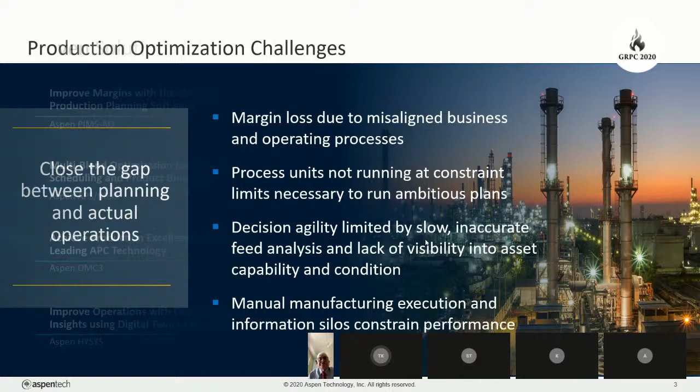Now, helping our customers implement production optimization is what we're good at. It's what we're proud of. It's what we do every day. And here I've listed some examples where we successfully delivered value. And I truly believe we can do this - we can do exactly the same for your organization.

For example, we implemented our PIMS Advanced Optimization Platform at the Global Energy and Chemicals Company across more than 15 sites. At Rompetrol, we had cumulative benefits of more than $45 million US over a period of 5 years by implementing our advanced process control technology.

So, having said that, I believe there's a gigantic opportunity still to deliver value when you look at production optimization in an integrated fashion. Let's go to the next slide.

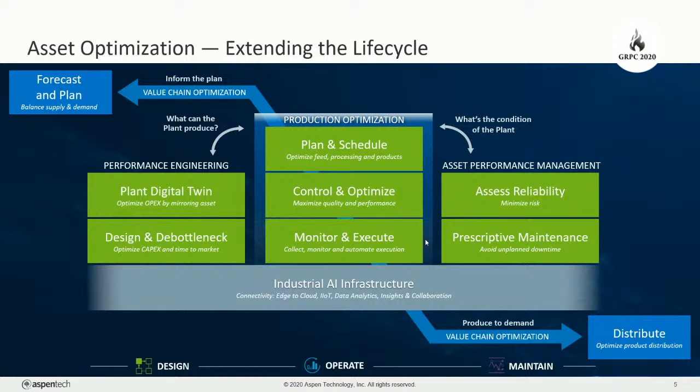And leveraging the new AI infrastructure that AspenTech provides, we believe we can drive new levels of collaboration, but specifically insights and automation across all these functions, by providing industrial AI infrastructure to all our applications, so we can help our customers achieve a higher level of asset optimization and ultimately unlock the smart enterprise. But for today, I'm going to focus on the production optimization bit. Production optimization is really the fundamental building block for a future smart enterprise or self-optimizing plant vision.

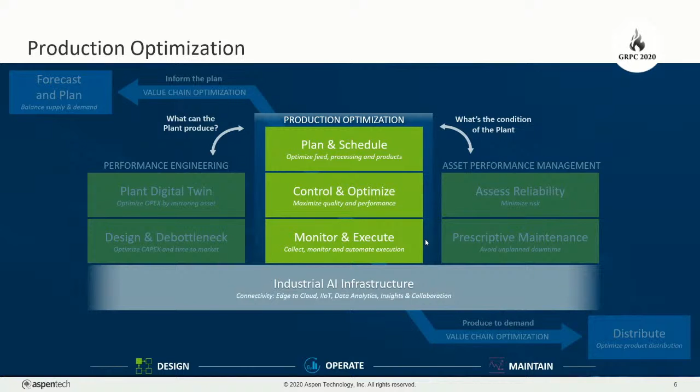So if we look at the production optimization solution, it helps address margin leakage all across your supply chain by connecting all of these business processes into an integrated workflow, as you can see here. Our production optimization is a unique solution that provides a holistic, integrated solution that integrates and unifies all these different functions. So when we look at the different layers, the first one is the digital twin.

Is your planning model up to date? Do we have the latest representations in our LP? Do we have a tool available that can use machine learning and smart algorithms to provide timely failure alerts? And that could feed into the planning and scheduling layer, where we do planning and scheduling, right?

Feedstock purchasing and scheduling - we adjust the operation based on day-to-day disruptions, which could be maintenance related, feed logistics, or product downstream delays that could cause the plan to not be achievable. Schedulers then have to re-optimize the plant, and that's why we see planning and scheduling hand in hand throughout the operating life cycle of a manufacturing plant.

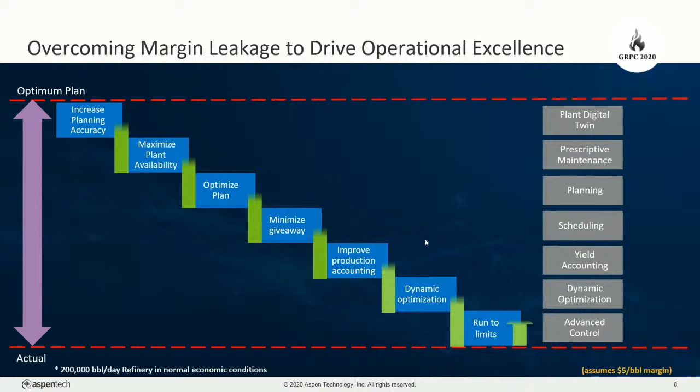Okay, so why is margin leakage so important? We saw in the previous integrated diagram that if one of these functions is suboptimal, there is margin leakage, and this slide illustrates that very nicely. This is based on our internal experience with many clients globally, and it's indicative.

What you can see, for example, if somebody would not have an integrated or planning solution in place, that the margin leakage could go up to 50 cents a barrel, and the synergy between all these different functions, we believe, drives very high values and goes into the tens of millions of dollars per annum, depending on your complexity and depending on the throughput of your plant. Okay.

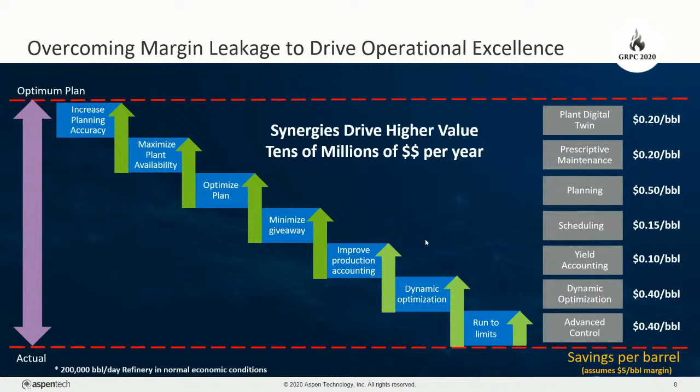So the GDOT models themselves are derived from our planning models. So, for example, FCCs, hydrocrackers, reformers. And so the reactor models in GDOT are similar to refinery LP models, albeit that we actually include non-linearity there where we feel that is beneficial, such as a conversion unit, an FCC, or a hydrotreater for that matter. And so they are more detailed models than you would typically find in an LP model.

And for this reason, GDOT actually incorporates best of both worlds. On one hand, it's similar to LPs, but on the other hand, we incorporate more detailed and complex models to accurately represent the units.

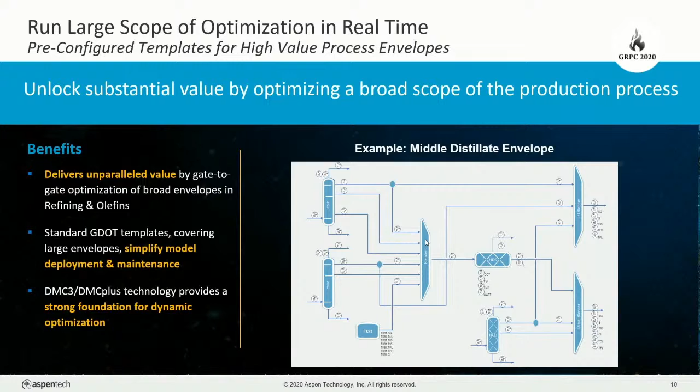So what are some of the key success stories? For distillate processing, we've shown to increase overall diesel production by 10% at certain clients, and also reduce the average quality giveaway, and this was worth $4 million to $10 million per annum. We also saw successful application of GDOT in naphtha processing, increasing the aromatics yield, for example, by 5%, and reducing gasoline quality giveaway. And we've also successfully increased conversion on feed by 3% in a residue processing application.

Also interesting is the application of GDOT in hydrogen and utility systems. They're a bit of a different category, and we've achieved significant improvement there, focusing not really on making more hydrogen, but basically to reduce losses and coordinate the different consumers in the system. And then finally, we do have references in olefins where we increase throughput by 2 to 5% by improving the yield, and this is worth $6 to $10 per metric ton of ethylene production.

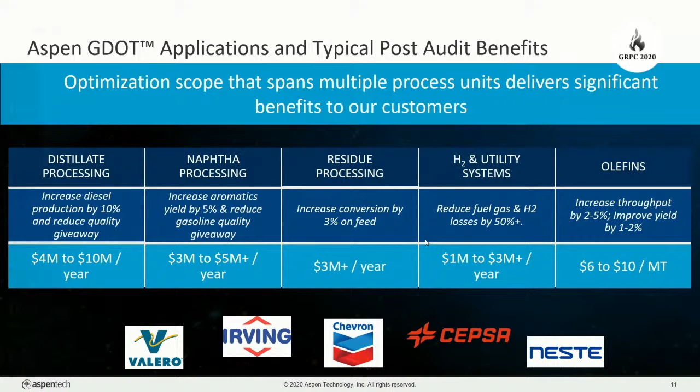So here's a case study. The refinery here was the Pembroke refinery, a Chevron refinery in the UK, and they wanted to go beyond the individual APCs and improve the profitability of the refinery. So we applied GDOT there, and it optimizes entire production trains from middle distillates to kerosene and even naphtha by coordinating multiple process units, all closed loop, with optimization cycles of around 1 minute.

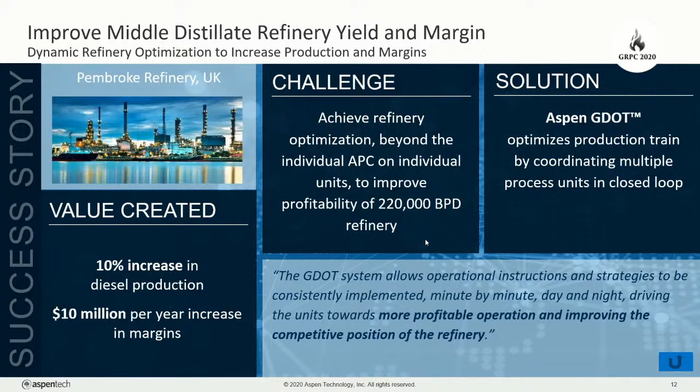And actually we achieved a 10% increase in diesel production, which in that year was worth $10 million per annum increase in margins. A quote from the refinery was that the GDOT system allows operating instructions and strategies to be consistently implemented—minute by minute, day and night, in the weekend—all driving towards a more profitable and consistent operation, and reducing the margin leakage. So this continuous coordination is really the key to success in production optimization.

If you remember, I presented the digital architecture earlier, and another key dimension is asset performance management. Unfortunately, today I only have 10 minutes, so very quick: with our asset performance management, we can expose the condition of the equipment or process by making prescriptive maintenance information available to the planning department. This enables you to plan interventions ahead of time, either to reduce the maintenance cost or to improve the margin leakage that could be caused by an unscheduled event, because you can plan for it well in advance.

An example of that was at Saras. They wanted a reliable operation of their refinery with their integrated power plant, and their strategic objective was to improve uptime but also decrease maintenance costs. And we, Aspen, installed or deployed Mtell as part of this endeavor in just a couple of weeks, and we built failure detection agents across a whole set of critical equipment.

As a result of deploying our Mtell solution, which uses artificial intelligence and machine learning to predict failures, we had a 91% detection accuracy with at least 30 days of lead time before a piece of equipment failed. So at the refinery, one statement was that they positively improved the reliability in 91% of the cases, and this led to a reduction in maintenance costs, as well as avoiding emergency or so-called unplanned shutdowns, and they could actually re-optimize their operation.

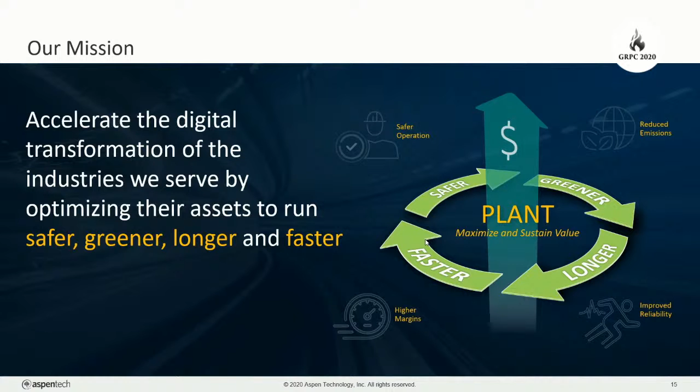Okay, so very brief overview. Our mission at AspenTech really is to accelerate the digital transformation of all the industries that we serve, to make sure we can optimize the assets to be safer, with no unscheduled breakdowns, greener, longer, and faster. And with that, thank you very much.

Can everyone hear me?

Hello, Tommy, Mr. Pramanik. Hi, can you hear me? Can you hear me? I think Mr. Pramanik is having a problem. Tommy, have you finished with the presentation? If you can hear me, Tommy has finished his presentation. Could you hear me okay? I'm now getting worried, was my audio coming through?

Thank you, Tommy, for the presentation. Can we take up the second speaker now? Alicia, can we take up the second speaker? Yes, I would like to tell Tommy that we were able to hear his entire presentation and see his presentation also, thank you for your presentation. I was getting a little worried there. All right, thank you very much. Over to Mr. Pramanik, thank you.

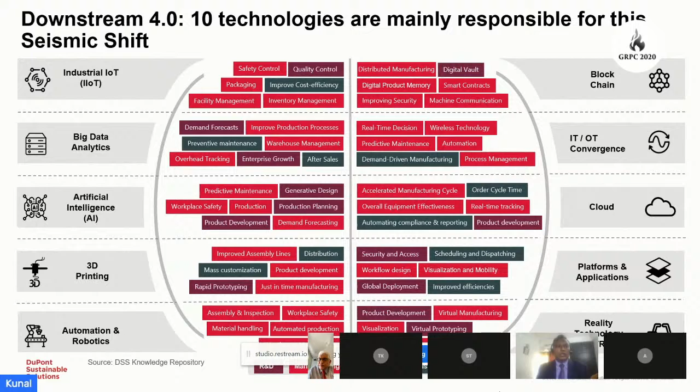And then the why and how part, understood even by management. What are the implications of not transforming, of not adapting to completely new ways, taking bold steps and transforming the organization, and how to do it in terms of process, technology, and more importantly, people—how to develop a culture of change which is accelerating.

A lot of leaders are having a thought around culture and making it one of the key aspects of the transformation that is coming in, because culture transformation is an implicit part and often the part which makes success a reality. Without cultural transformation, success can never be achieved.

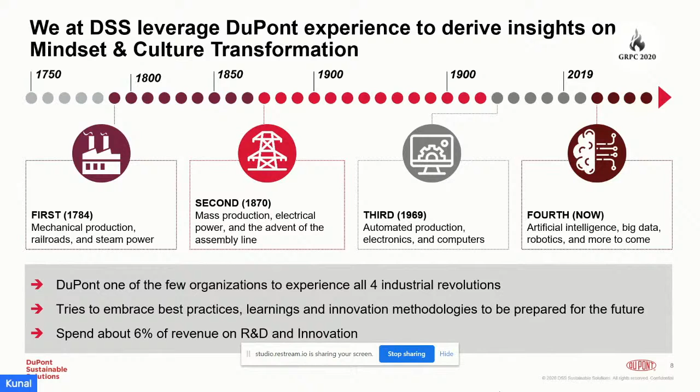At DuPont Sustainable Solutions, we leverage the DuPont experience to derive insights on mindset and culture transformation. At DuPont, we have experienced 4 industrial revolutions, starting with mechanical production and to date with the new technologies that are coming in. And so we derive our best practices, learnings, and methodologies from what we have seen during this course of time and what we have learned and implemented.

In our perspective, there are 3 critical challenges for companies to overcome to achieve the full potential of Industry 4.0 digital transformation. First is a vision and mindset around digital maturity—a lack of digital transformation strategy or roadmap. Is it understood across the organization? Do they have a vision of how to redefine doing new things, making technologies as enablers?

Second is the scale in terms of value chain. Do they have the will to transform across the value chain, across functions, and across levels? And do all people in the organization across all levels have the mindset aligned, have the competencies built in for the change objective for sustenance?

Do they understand that the new structures will need to be redefined and there will be new ways of work to get done utilizing these technologies? Thirdly, the challenge is that people expect technology to solve problems. The technology doesn't solve problems. It is a business transformation which can be enabled using these technologies. So these are the 3 challenges.

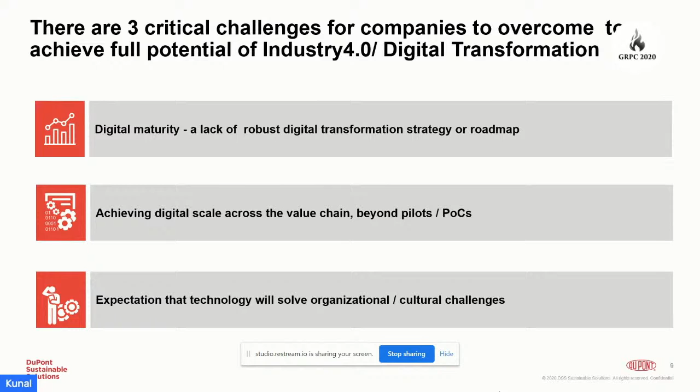Now I would like to showcase an example on how to address these challenges to start building a roadmap for the transformation by doing a digital assessment. I'm taking a case of a digital transformation roadmap for a refinery.

It begins with business at heart and people at the center. So first and foremost, across the value chain, we define the critical functions that are there. In this case, we have taken 14 functions, and then we have bucketed more than 50 domains in the organization or in the refinery under these functions. For example, if we take maintenance and reliability, we have bucketed 5 domains of turnaround, equipment performance, so on and so forth under it.

Why is it important? Because we need to understand what digital interventions are required in each of these domains, and what competencies and mindsets the frontline personnel have in each domain. Because they generally are at different varying maturity levels in the organization. What needs to be planned to bring them to a level, and what kind of implementation can be done?

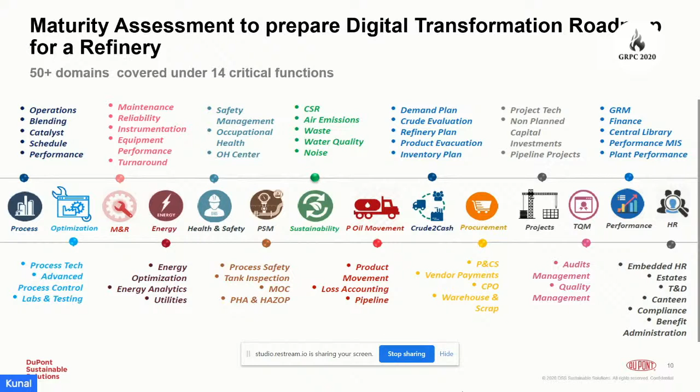The approach that we adopt is in terms of process maturity and digital maturity, with the people aspect built in to both process as well as digital.

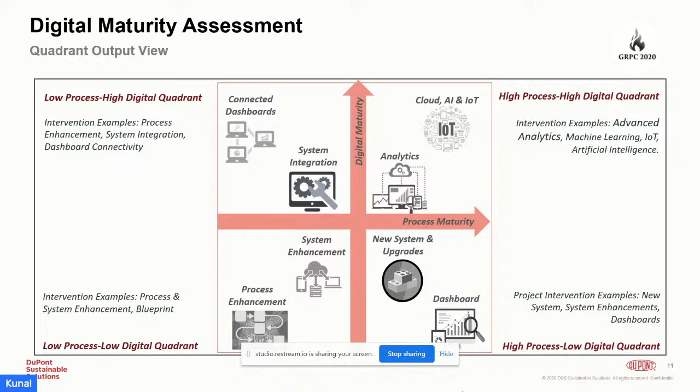After doing this whole piece, assessing each domain onto this methodology, we also do a business criticality assessment of each of these domains in terms of how critical it is from a business standpoint, so as to prioritize the investment in implementation.

Coming back to our example, on the left hand side of 14 functions in which the 50 plus domains were divided, we do a complete digital maturity assessment.

We have taken the example of one of the functions, which is maintenance and reliability. Under this function, on the right hand side, you can see 5 domains: maintenance, reliability, turnaround, instrumentation, and equipment.

We do an assessment including people as a part of both process maturity and digital maturity, and then talking with people, getting their views, and understanding from a business standpoint, we give a business criticality score to each of these.

And then we define the interventions that are required in each of these domains under a particular function, going across for all functions and then enterprise wide across the value chain.

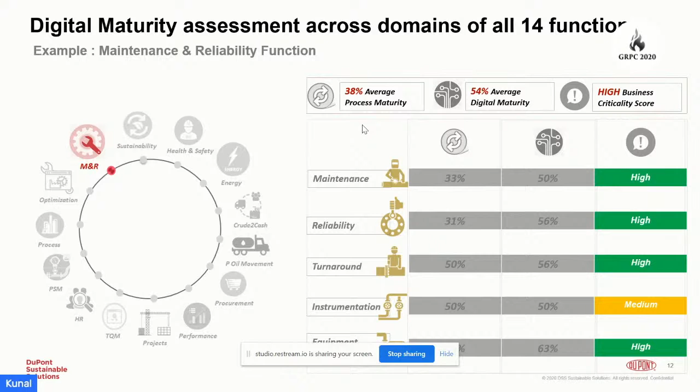To just showcase an example of how the digital interventions are done and plotted: in the maintenance and reliability function which we have been taking, a total of 15 challenges were identified along with the people in that particular function.

Hello, Kunal. Hello. Yeah, this is your chairman speaking, session chairman speaking. Could you please wind up in another 2 minutes? Sure, I'll go a bit fast. Yeah, please. Thank you, sir.

So then we placed around 7 digital interventions, 6 of which had a high impact on the organization and 1 had a medium impact, be it turnaround time, process reports, and so on and so forth.

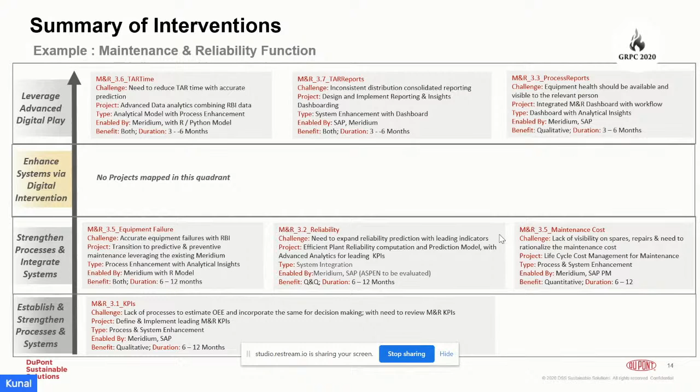Then we did projects around each of these implementations. The duration and everything is mapped out in this particular chart. The digital interventions take a little time, but the organization capability and the transformation from a culture specific point of view takes longer. This is where we help our clients with hand holding, making people understand the technology implications and bringing turnarounds.

Similarly, from a digital assessment perspective, since we have taken the case of maintenance and reliability, the suggestions for IoT came up, integrating them with the asset management software so that the maintenance in charge can get an equipment health in real time through KPIs in terms of demonstrated health meters, correlate cost to failures, predictive failures, and the frontline maintenance personnel can automatically get generated schedules and alerts to take action.

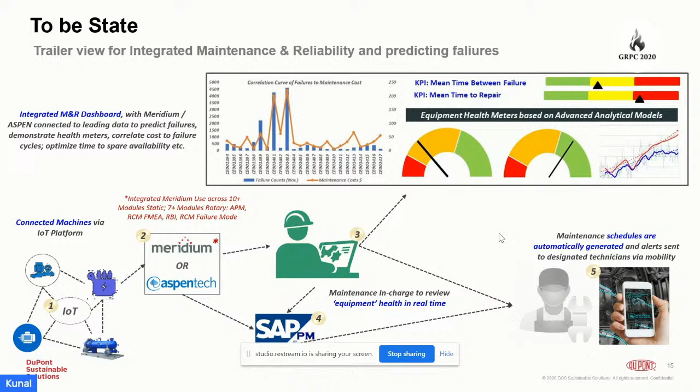We did it across all 14 functions and then gave a business criticality score in terms of prioritizing the investments, and then developed a roadmap taking into account and addressing three challenges: one, the complete vision; the scalability part across all levels in the organization, across functions and across the value chain; and third, building a competency roadmap for the people to achieve that.

With that, I'd like to end my presentation in the interest of time. Thank you so very much. For a detailed conversation, I'm available. My email address and phone number are given there.

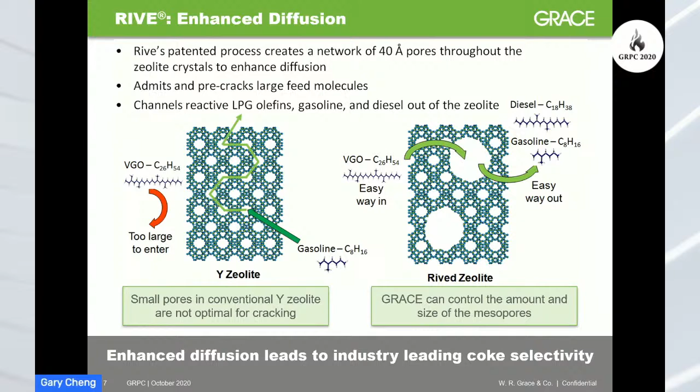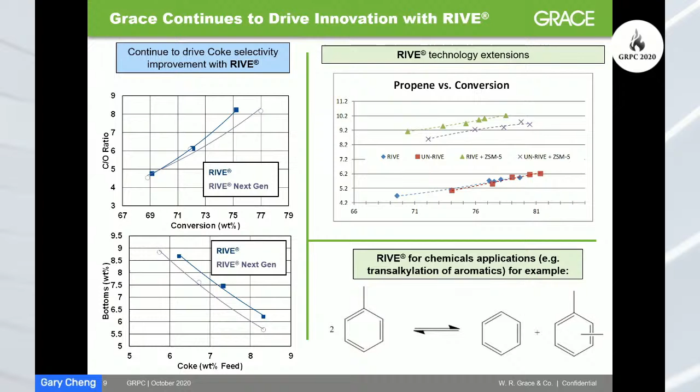So we're continuing to push the envelope on conversion, on coke selective slurry upgrading, and really driving more profitability by using this technology. Shown on the top right is some Rive technology extensions, including how to apply Rive in concert with ZSM5 to drive optimal propylene yield for refiners. And finally, we're also innovating in the area of chemicals, where Rive has the ability to improve transalkylation chemistry, as shown in this graphic on the bottom right.

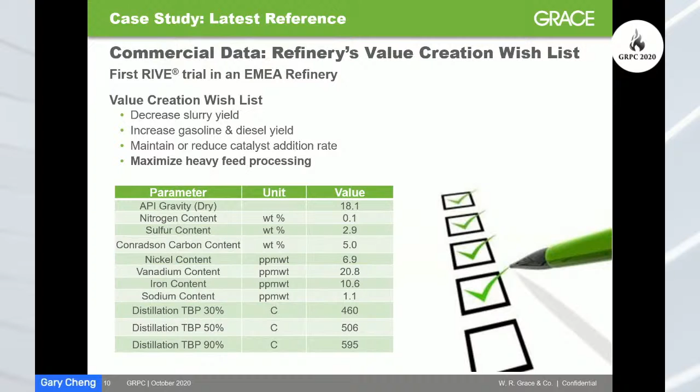Looping back and tying back to the inaugural session and the panel discussions, there was repeated mention of sustainability. This is a key topic in today's world. While Grace is making advancements in sustainability in many facets at our own manufacturing facilities, as well as our products, one key product technology for our customers is Rive, as it offers the lowest coke make per unit of conversion of FCC feed. Rive Catalyst provides refiners the ability to overcome traditional unit constraints, such as wet gas compressor, regenerator bed temperature, etc.

Rive offers the ability to have the lowest dry gas make in industry, process unconventional feeds, such as bio oils or unconventional streams, and overall offer the best coke selectivity in the industry. This results ultimately in a decrease in CO2 emissions. And finally, minimize logistics footprint at our manufacturing facilities across the world.

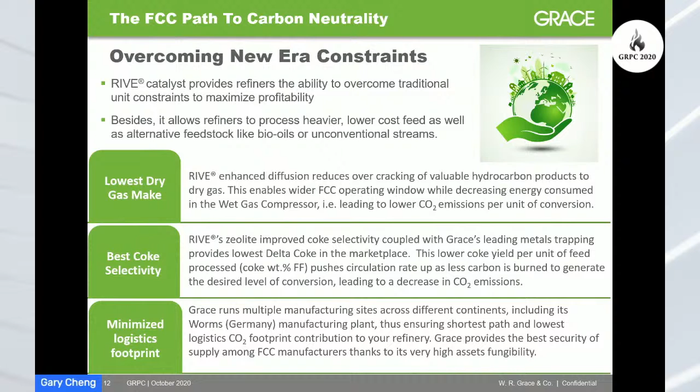As mentioned in my earlier slide, while we talked about Rive technology and catalysts, we're also very excited to share some news about a recent trial for Zavanti, which is the latest additive available from Grace. This is the first public forum where we're sharing the story, and I hope you find it interesting.

But first, let's have a quick look back on the history of innovation for Grace in the area of ZSM5 technology. Grace developed the first ZSM5 technology in collaboration with Mobil back in 1984. This was called Additive O. Through the years, you can see a pipeline of new products introduced by Grace: Olefins Max, Extra, and Plus throughout the 90s and early 2000s, Olefins Ultra, HZ, MZ, and this latest one is Zavanti.

We felt that with a long history of olefins names tied to the product, Zavanti was really a step out and gives it the credit that it deserves because it really is a breakthrough technology.

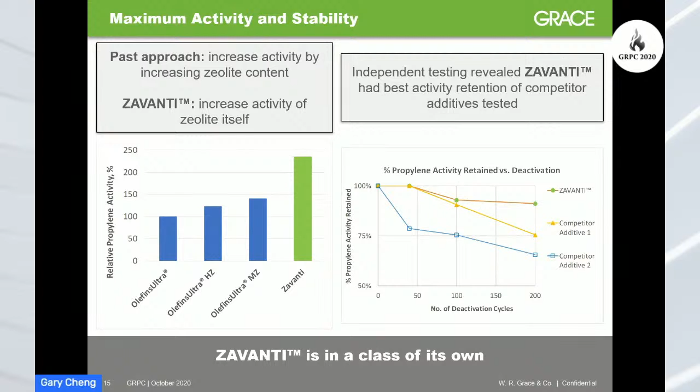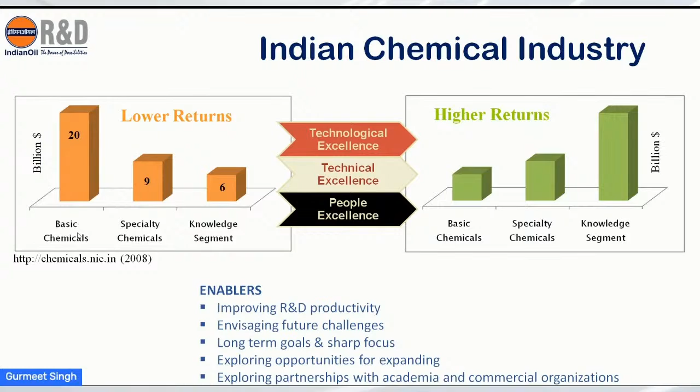And if we talk about innovation, we have got a very beautiful R&D center at Faridabad, and you are welcome to visit it sometime. It is on the south side of Delhi, around 35 kilometers from the Delhi center.

Last year in May, these were two news excerpts which I have put on it. The first one is in the Energy World, where it was declared that we are the first PSU in India to cross the 1,000 patent milestone, and that was a very big step for us. Probably the next 1,000 will come in a much shorter time.

On the right is an excerpt from Mint, in which the underline was that the R&D team has made considerable progress even in the highly IP-crowded field of Ziegler-Natta catalysts. This is a very proud statement because I am leading the internal efforts in Ziegler-Natta catalysts.

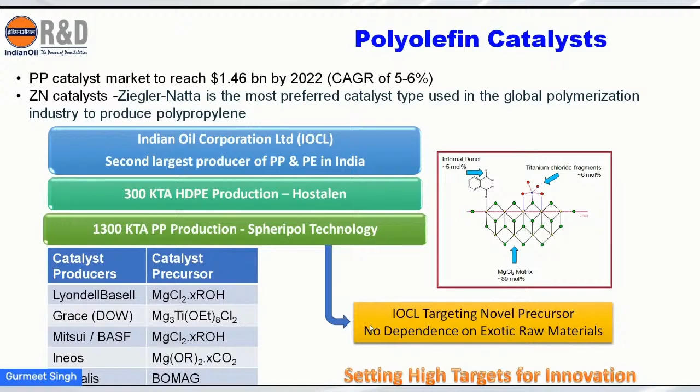So we were able to develop novel technologies for producing magnesium precursors, which is the heart for the total catalyst in say polypropylene and polyethylene. These catalysts are highly specialized, molecularly assembled, and crystallite size is very small. When people are excited with the nano range, these catalysts have crystallite size typically ranging between 40 to 75 angstrom. The catalysts we developed have been extensively evaluated by third parties and benchmarked against commercial offerings, and on almost every performance benchmark, our catalyst has exceeded.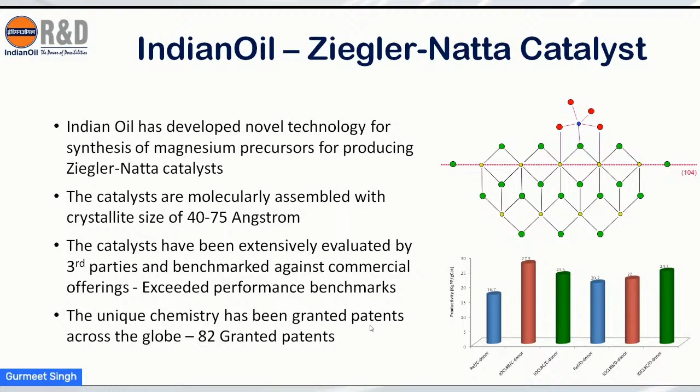82 patents have been granted based on this unique chemistry, and we have extended this chemistry to other fields also.

We have developed two different precursors, and these precursors are unique to IOCL and they are patented. They have given us the right catalyst systems for the polypropylene.

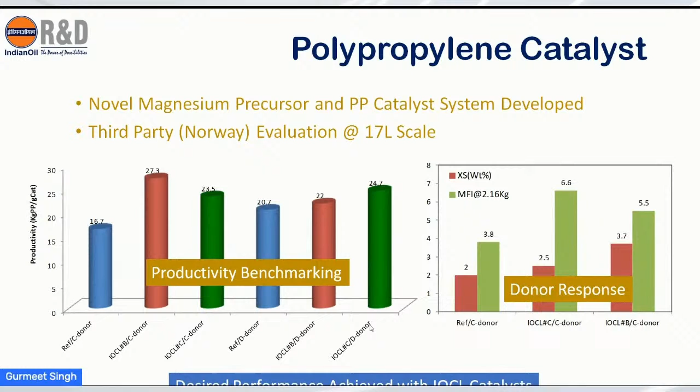These are a few of the parameters which we have identified, and the catalyst systems were benchmarked by a third party. This is the data from a Norwegian company. In the productivity benchmarking and other aspects like donor response and hydrogen response, our catalysts were found to be superior over commercial offerings.

We have also extended this precursor technology to the polyethylene catalyst. Again, the catalysts have been evaluated extensively in-house and also by third parties, and have exceeded the productivity and hydrogen response figures of any commercial catalyst. Both catalysts are now under commercialization.

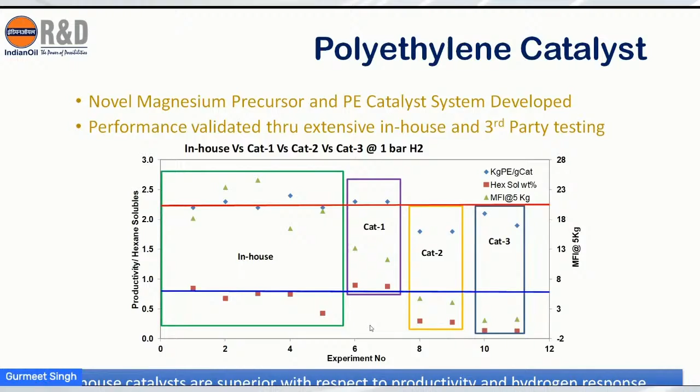We extended the same catalyst technology to produce an entirely different class of polymers, the drag reducing agents, which have very high molecular weight of more than 20 million daltons. We were able to make this product using alpha olefin polymerization. This product has been tested at pipeline and given excellent results. After multiple commercial trials, the technology has been established. We have got a patent on this technology, and currently it is under commercialization.

Now, in terms of innovation, we are also moving from in vitro to in silico, and we have established molecular modeling at our end. We are using density functional theory models on HPC clusters, high performance computing clusters, to funnel ideas so that we don't have to do a lot of bench work. If we have 100 ideas, we can filter down to 10, and then only those 10 ideas are extended to actual bench work.

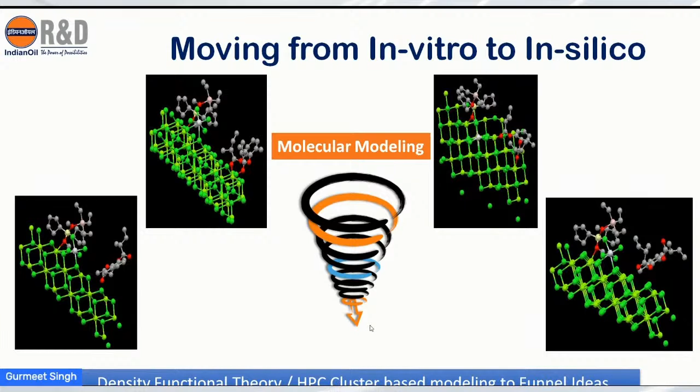In conclusion, our research foray into petrochemicals is purely based on innovation. We are not building upon others' patents or knowledge; we are creating knowledge. We have developed robust precursors using state-of-the-art technologies like parallel and automated processes. Both precursors have been established for production of high activity, high productivity, high stereo regularity catalysts for producing polypropylene and polyethylene. Both catalysts have shown excellent performance with the desired product characteristics, which is also very important. Application of molecular modeling has been initiated to understand performance and funnel ideas. All our innovation is extensively protected.

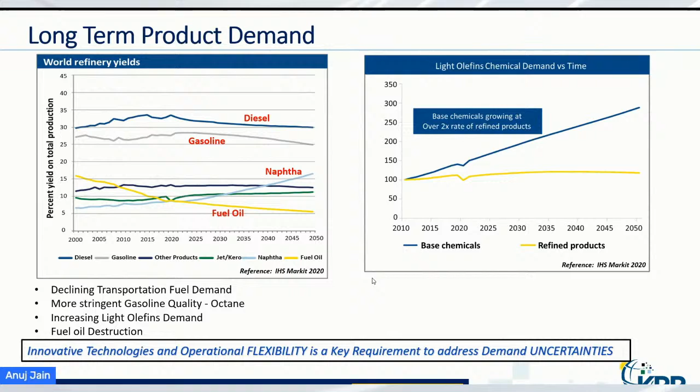So going through this, ROSE is KBR's solvent deasphalting technology. This is one of the solutions to reduce fuel oil generation. With the ROSE unit, it basically converts residue into a high value feed, which is DAO. This is an additional feed for conversion units like hydrocracker, mild hydrocracker, FCC, RFCC, and other units in the refinery. With the help of this feed, it saves expensive feed going to these units in place of this. Then we have certain products out of these units which are C2, C3 olefins.

Basically, these are the destination for the SCORE and cracker and MaxOfin technology. Then we have C4, C5 olefins coming out of these conversion units, which can be used for additional high octane gasoline with the help of K-SAAT technology. We have naphtha distillates, which can be additional transportation fuels, and also lubes for bright stock. So these are various components which are coming out from these conversion units.

Now from the ROSE unit, we also have pitch coming out of it, and for that pitch, we have several routes to handle it.

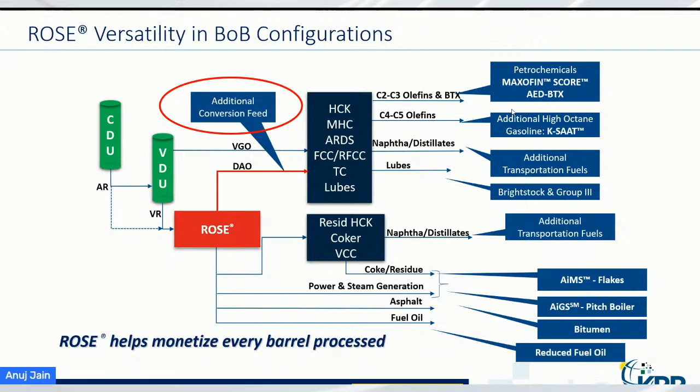Other than that, we know this pitch can also be used for making bitumen, and with all this, we are definitely going to reduce fuel oil generation. So overall, with the ROSE unit, we can monetize every barrel processed in the refinery. There are several solutions available, and we have a commercially proven scheme for pitch and residue handling in the refinery.

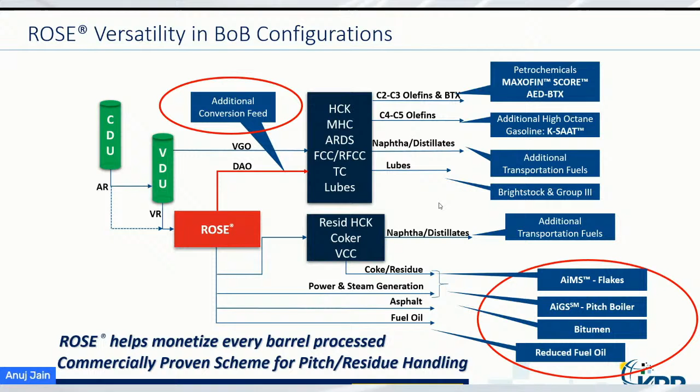I'm going to talk about FCC. KBR is a pioneer in FCC technology. KBR developed the world's first known commercial FCC unit at Louisiana in 1942, and also designed some of the first VGO and resid crackers. Since then, KBR has executed more than 120 grassroots units.

And if you see the timeline from 1942, in 1961 we have come up with resid FCC. Then in 1998, Maxofin, which is mainly to produce propylene. And in 2006, we came up with a new disruptive technology, which is K-COT.

In this technology, we can use C4, C9 olefinic streams, and the reactor we are using is the same reactor as in FCC, with some changes in risers, temperature, pressure conditions, and proprietary catalyst. With the help of that, we can produce more propylene than ethylene. K-COT can be integrated along with a cracker and also as a standalone unit in refinery and petrochemical configuration. So this is a quite unique technology, and it will give more propylene than ethylene, with a ratio of up to 2:1.

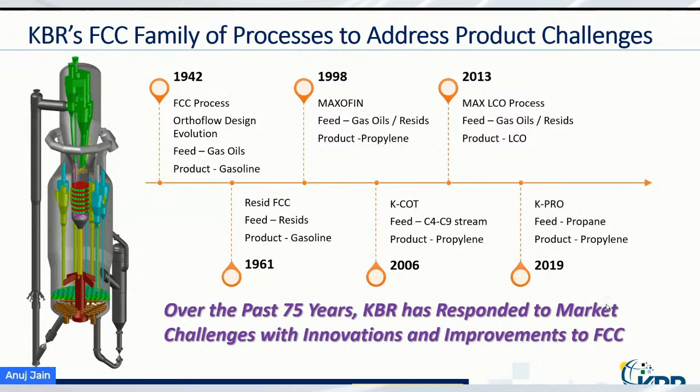So the idea to show you this timeline for FCC is that over the past 75 years, we have come out with a lot of innovations and improvements to FCC units, providing different solutions in the refinery that can be integrated with petrochemical units.

Another technology which I would like to talk about: as we are moving towards stringent environmental norms, more and more hydrotreating is being done. Hydrotreating reduces sulfur, but at the same time it also reduces octane. So KBR's solid acid alkylation technology, K-SAAT, maximizes the yield of motor fuels and enhances production of an ultra clean blend stock, which is alkylate.

If we quickly go through this process, the feed is basically C2 to C5 olefins together with isobutane, and in the presence of a unique solid acid catalyst, we can produce alkylate in the reactor. It's a 2+1 reactor scheme, where 2 reactors are in operation and 1 reactor is in standby for regeneration.

With this, the alkylate we get from this unit is of higher octane than that obtained by any other liquid or solid acid catalyst under a wide range of process conditions.

It's a simple process, low capex, and we can look into a few key advantages of this process. Basically, it's very flexible to process C2 to C5 olefin feed, and the catalyst is proprietary from KBR and is precious metal free. It is basically a zeolite based catalyst, so very good from an OPEX and environmental point of view.

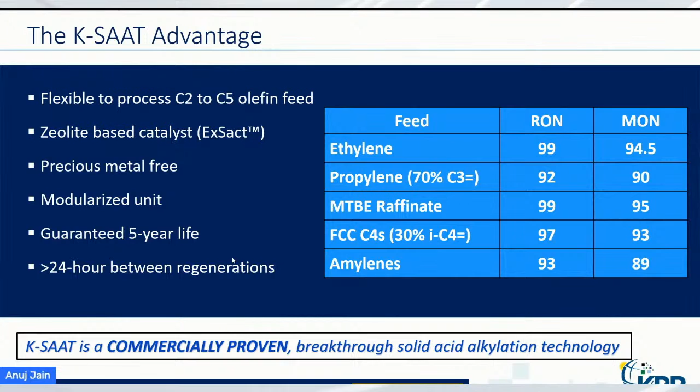The regeneration cycle required is more than 24 hours, but the actual regeneration time is quite less, almost 12 to 16 hours as such. This technology is also commercially proven. We have references, and many projects are in the pipeline in the design phase.

I would like to touch upon another technology. KBR introduces MAX-ISOM as a technology innovation for low-cost production of high-octane isomerate gasoline. It's highly flexible and compact with low energy requirements. As you can see on the screen, it's very compact with a very low number of equipments.

It basically uses a regenerable catalyst that isomerizes and separates the isoparaffin products while recycling the normal paraffins over the catalyst, with reaction zones within the same distillation column. So we have one column for the entire feed, and the last bed will handle C7 and benzene saturation, whereas the first and second bed will handle C5 and C6 stream.

This innovative design offers an energy efficient, compact, and low capex alternative. It can accommodate high benzene content, approximately up to 20%. If you look at competitive technologies, those are limited to 5% benzene. Also, it can handle some amount of contaminants.

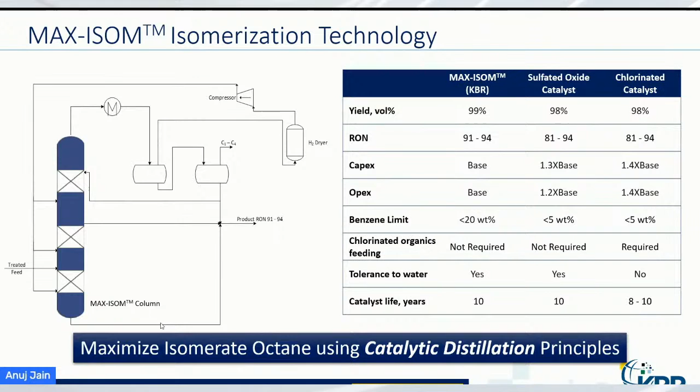We can look into a few other key features of this technology: high selectivity, lower capex or opex, lower footprint. As we have seen, there's a very low number of equipments involved in this technology.

MAX-ISOM fits for both grassroots and revamp schemes. The revamp option has very low capex incentive, and it can be implemented in any of the available technology. It's a more efficient process with maximizing octane.

It can process C5 to C7 feed, as I said earlier, with higher limit on benzene and high tolerance to contaminants. I have shown only one scheme on the screen, but there are many different configurations that can be tailor-made to a refiner's need.

Commercially, for this technology we have a pilot plant running, and a couple of plants we have designed. For one of the plants, equipment has actually been ordered, but construction is currently on hold. So as of today, we don't have a running reference, but we are in discussion with a lot of clients to come up with a unit very soon.

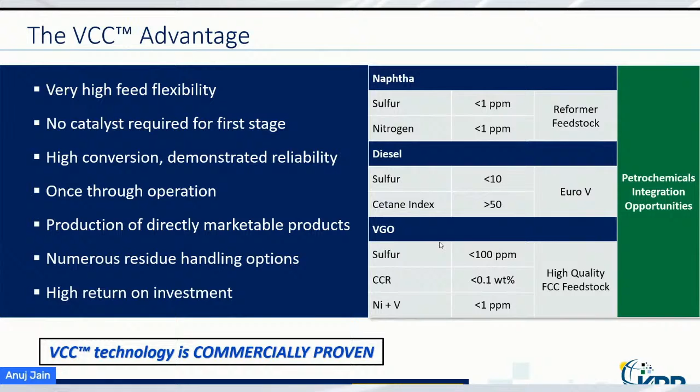Just to sum up my presentation today, I would like to cover some bullet points. Technology innovation is a continual process with a long-term technology landscape. We need to look beyond what is new to what's next, and innovative technologies and operational flexibility are key requirements to address demand uncertainties.

We expect that residue upgrading, steam cracking, and product upgrading technologies like alkylation will be the focus for adaptation and essential to survive in the future refining market. KBR has innovative technology solutions to address refiners' challenges. Thank you.

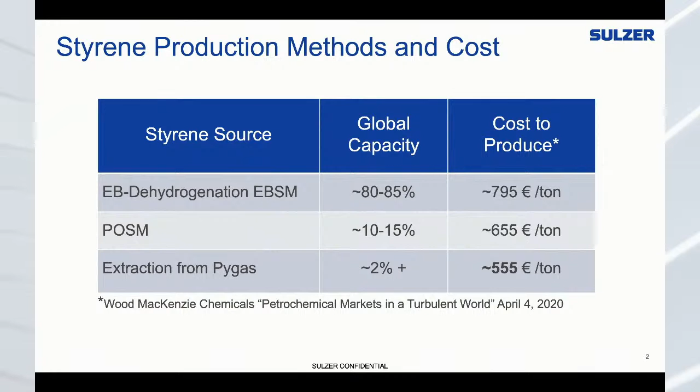The potential of styrene, basically when we are talking of integration of refinery with petrochemicals, this type of configuration is obvious, and more and more crackers are coming. From this cracker, pygas has a potential of styrene from which it can be extracted.

Normally in a cracker, C8 pygas is hydrotreated, then extracted to produce benzene, toluene, and xylene. In this case there is no production of styrene, and any styrene present in pygas gets saturated in this hydrotreater. It is very important to maximize the value of pygas based products, because these cracker complexes have to compete with gas based crackers where the yields of ethylene and propylene are much higher.

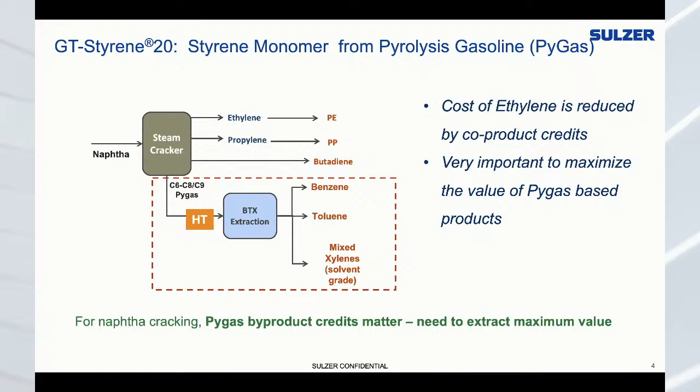Unless we add value to these pygas byproducts, these crackers will not be competitive with other world-size crackers based only on gas. So this valorization can be further improved by extracting styrene from this stream. Can we go to the next slide?

Styrene can be produced if we take this C8 hard cut to recover styrene, and raffinate is recycled back to the hydrotreater, with the rest of the things produced as in the conventional configuration. So it's a very good fit here, and the advantage is, once we take the styrene out through this extraction...

It upgrades the xylene quality - mixed xylene of isomer grade is produced. Without this extraction, it is solvent grade xylene because of high content of ethyl benzene. At the same time, once we recover the styrene here, hydrogen consumption in the hydrotreating unit is also reduced, along with other advantages in the operation of this hydrotreater. So this way we are adding value as well as improving performance and other measures in processing of the C8 cut.

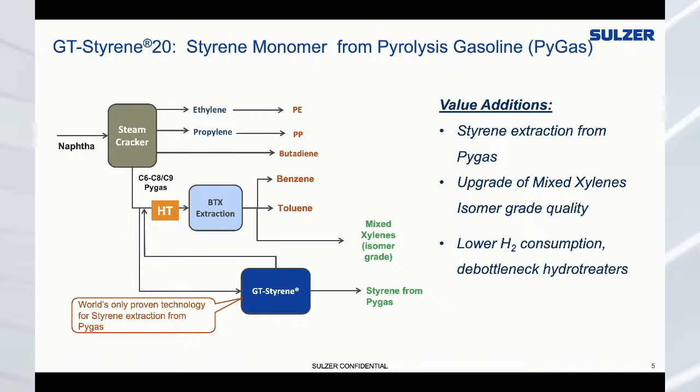Next slide please. For a steam cracker, if you see the potential of styrene - for a 1 million ton ethylene from liquid feed cracker, it has a potential of up to 35 kTA of styrene monomer.

Historically, this styrene recovery from pygas was not considered because the right technology was not available, and ethylene crackers were not large enough to produce styrene of economic scale. Typically, if we have a 1 million ton cracker, it can give us sufficient size to produce styrene on an economically viable scale.

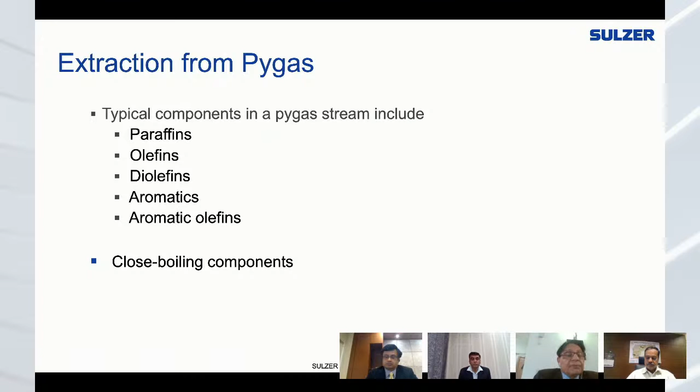Next slide. To extract this styrene, what is important is that it has to be extracted from a mixture of paraffins, olefins, diolefins, aromatics, and aromatic olefins, and these are all close boiling.

Let's go to the next slide. This is the styrene molecule, boiling at 145 degrees centigrade, and if you compare the other molecules, it's very close - 136, 144, 142, 139, 152. So recovery of this styrene through distillation is not a feasible way.

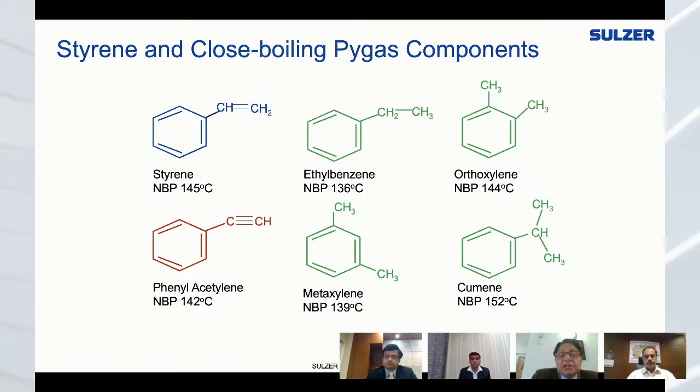To alter the volatility, a large increase in relative volatility is essential. It has to be done in the presence of a solvent. That's why it is extractive distillation, and Techtiv-200 is the solvent used to alter this relative volatility and produce styrene.

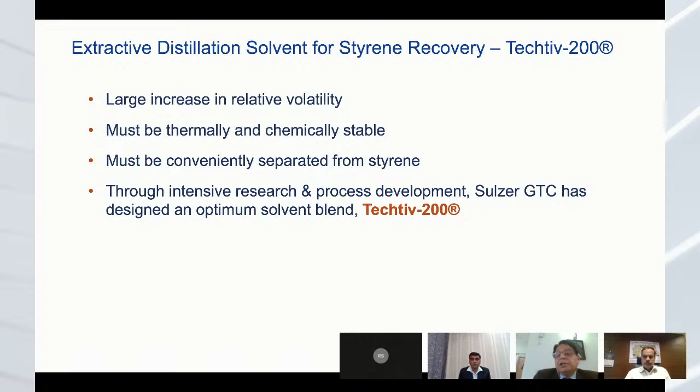Solvent should be thermally and chemically stable and must be conveniently separated from styrene. Through intensive research and process development, Sulzer GTC has designed an optimum solvent blend, Techtiv-200, customized for this styrene process.

Separation of styrene monomer from close boiling components using Techtiv-200 is still the core of the process. This process GTC has been licensing, and already 3 units are commercially operational. The core process still remains the same, which is extractive distillation using Techtiv-200.

It includes post-extraction. Finishing includes 4 different processing steps. One can produce styrene in the conventional way using Techtiv-200, but it requires 4 different steps which have to meet color requirement, sulfur requirement, oxygenates, heavy and polymers. So these 4 steps

are not that elegant, and through innovation, GTC has come out with a process using a single processing step of crystallization. This innovation reduces these 4 steps to 1 step and reduces the capex and opex for this process.

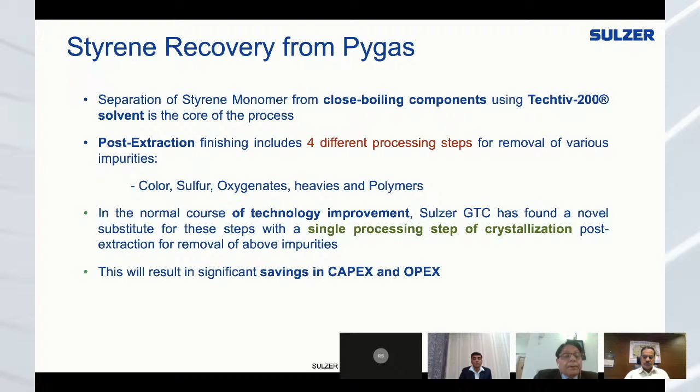If you see the first generation process, Pygas C8 heart cut was hydrogenated for phenylacetylene removal, and it goes through the extractive distillation step, extract EDC as well as solvent regeneration. From this, the extract is subjected to purification steps, which include color removal, oxygenate removal, and sulfur and heavies removal to get 99.8% styrene monomer.

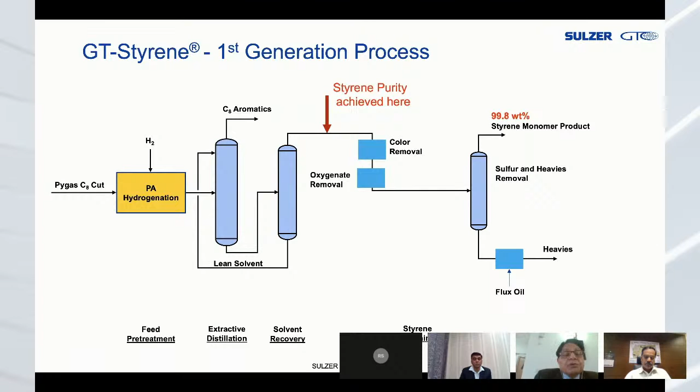Actually, the styrene purity required is achievable here, which is 99.8%. But to meet other specifications of the styrene, these polishing steps are required to convert it to a marketable product.

This ASTM D2827 specification styrene basically requires 99.8%, but at the same time there are color and other specifications which have to be met, and those polishing steps are there to basically meet all these specifications.

In this GT Styrene 20, the second generation current extraction process, all those polishing steps have vanished and are replaced by one crystallization-based process. This is fractional crystallization which allows pure ultra high purity styrene, that is 99.95%. In the previous generation we were talking of 99.8%.

Other advantages are a new approach for final purification of styrene: one step crystallization versus multi-step processing. The crystallization makes an ultra high purity product meeting all specifications. Nominal purity is of the order of 99.95%, and total sulfur of less than 5 ppm is possible.

This was the process flow diagram from the previous generation, which was after styrene dehydration. It included clay treatment, styrene finishing column, and falling film evaporator. All these operations were involved to polish the styrene to the required specification.

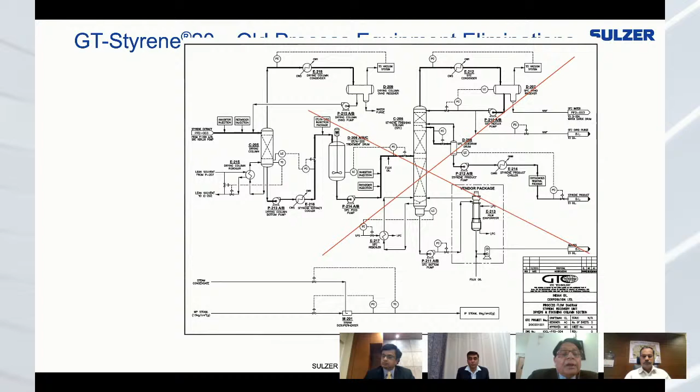In the next generation, all those steps are avoided, and we can produce ultra pure styrene using fractional crystallization, meeting all the specifications. If you are interested in more details about this fractional crystallization, in our booth there are brochures available. This is already a commercialized step for other applications, and these crystallizers are from Sulzer.

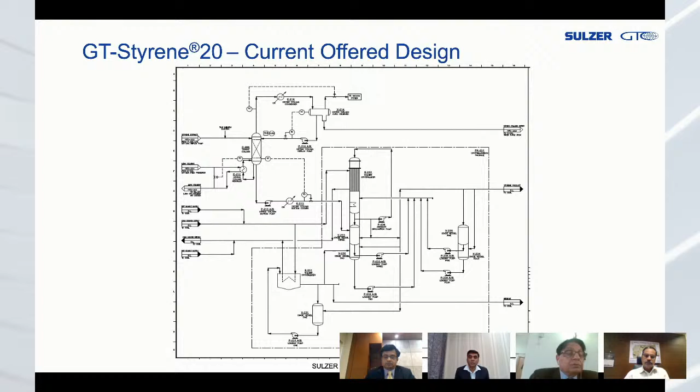As you know, Sulzer has acquired GTC in the last year, and after this acquisition, all those technologies are merged, and this innovation which I am presenting is right now.

With this step, the advantages are lower equipment count because many steps have been removed, lower capex, lower opex. The electricity can be replaced if we can use ethylene from the cracker plant as cold source for the crystallization unit, a smaller plot area, and opportunity to relax operation of DC8 and other operations.

The purification section design with crystallization is commercialized. This purification section is already commercialized for different applications. It has no moving parts, no filtration of crystals, no use of solvents. It's a very simple and well-proven step for crystallization. Thanks.

This styrene recovery fits well into the naphtha complex, where we can take out the C8 cut, recover the styrene, and recycle the raffinate to the first stage hydrotreater.

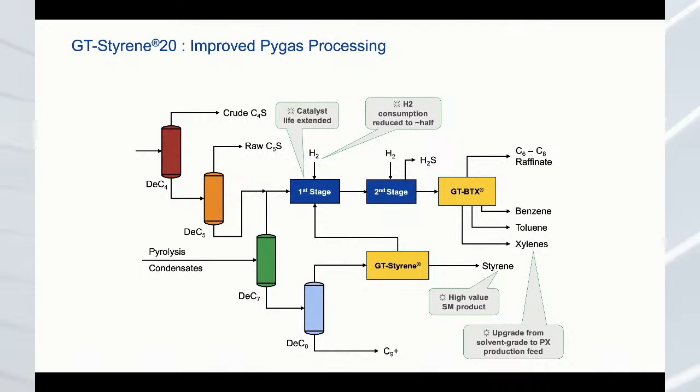So all these advantages contribute significantly to the economics by integrating styrene recovery in a cracker complex.

In terms of first stage hydrogenation reactor advantages, the temperature at the reactor outlet is reduced with new generation catalyst after removal of styrene. At the same time, reactor feed ratio is reduced from 2.8 to 2.3. Catalyst regeneration cycle increased to 4, and catalyst life extended from 4 to 7 years. These are additional advantages in hydrotreating operation, on top of the price differential.

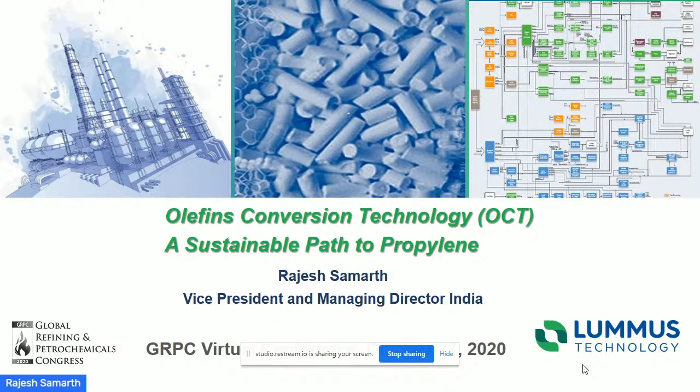So today I'm going to talk about olefin conversion technology, which is basically how to make propylene in a sustainable manner, and how to have the flexibility to make this propylene.

Lummus is an over 110-year-old organization, and we are a premier licensor of refining, petrochemical, polymers, and gas processing technologies. We supply catalysts and proprietary equipment as well. We offer over 130 plus technologies, over 2,400 licensed units, and lots of patents. The big change that happened to us this year was that, as of July 1st, Lummus was acquired by the Chatterjee Group and Rhone Capital. Now we have become a standalone technology licensing organization, so you can see our logo also looks different now.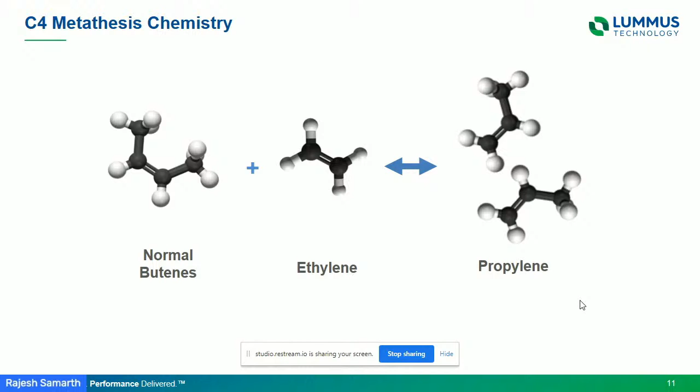So, a process overview. The process is actually very simple. It is the standard metathesis process where you are reacting normal butenes with ethylene to make propylene — a C4 plus C2 makes 2 C3s. Among normal butenes, the reactive one really is 2-butene. But what happens in the process is that 2-butene and 1-butene are in equilibrium. So as 2-butene gets consumed in the process, 1-butene isomerizes to 2-butene under equilibrium, and you can drive the reaction. So the feedstock is basically either 1-butene or 2-butene, although 2-butene is in a way preferred.

So there is another version of it, which is C5 metathesis, in which you can also react normal pentenes with ethylene. A C5 plus 2 ethylenes — a normal pentene C5 — will make 3 molecules of propylene. Isopentene will also react with ethylene, but there will be a byproduct of isobutene.

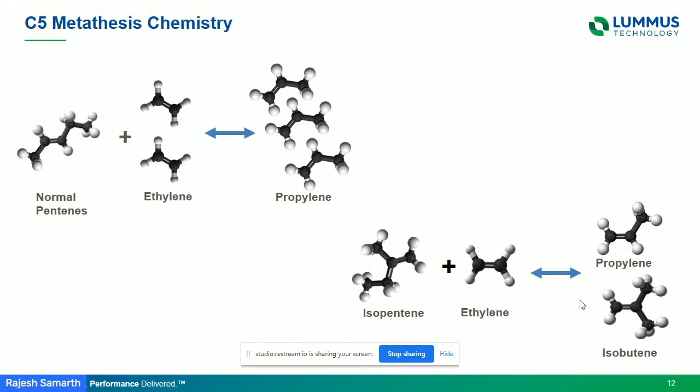So OCT actually is a very simple process. The first step is the purification of the feedstock. It's a catalytic process, so some of the bad actors such as sulfur, moisture, and some of the highly olefinic and diolefinic components have to be brought down in concentration. So that's the first step.

The second step is just the reaction that we talked about. And then the third step is separation of the products. That's also a very simple step, essentially two distillation columns in which you are separating the C2s from the C3s and C3s from the C4s. C2 is recycled, C4 is also recycled with a purge of some of the heavier byproducts which are produced.

So here, if you just look fundamentally at this process, there is very low energy consumption in the process itself, because all other processes for producing propylene require some kind of cracking, whether you look at steam cracker, FCC, or even dehydrogenation. So there you need to provide a lot of energy, but here this metathesis process is essentially energy neutral between the feed and the product, because really what you have is you are making propylene, there is no propane.

So there is no superfractionation required, and you can produce very high purity polymer grade propylene easily. It's a low pressure, relatively low temperature, simple process, so few equipment, and all predominantly carbon steel metallurgy, which helps having a lower investment cost.

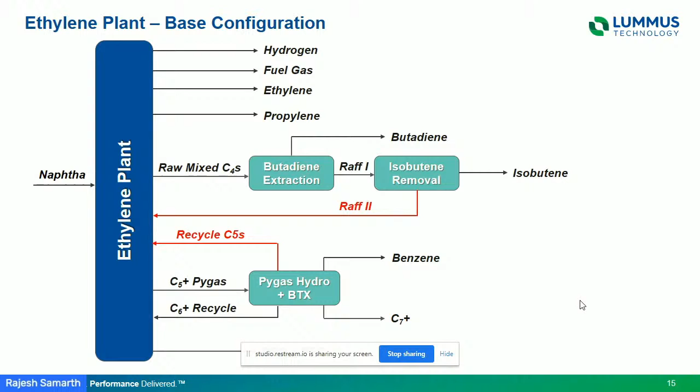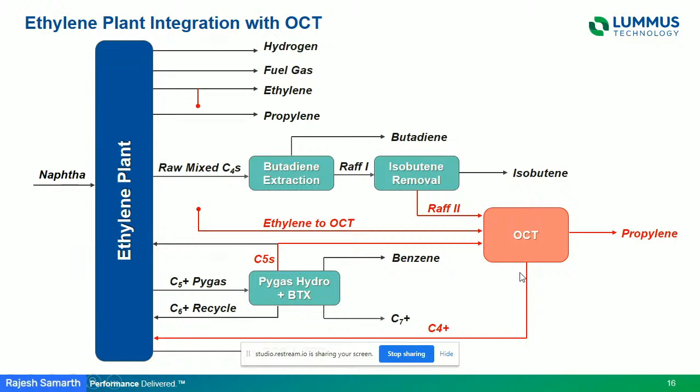So here, both C4s and C5s will react with ethylene to make propylene. And any of the byproducts can be recycled back to the naphtha cracker. So you can see it's really speaking a simple add-on to the existing naphtha cracker.

Now, this is something important I want to point out to you. So let's look at a typical low severity ethylene naphtha cracker. The P2E ratio, propylene to ethylene ratio, will be something like 0.65. So that would be your base case - that's what's making in the cracker, and that's what's coming at in the total complex.

Now, if you actually put in an OCT process, what you can do is operate your naphtha cracker at a much higher severity. That will allow you to go actually with a lower ratio of P2E of 0.5, so a lot more ethylene production. But with OCT, you can bring the ratio back again to 0.65.

But what's the advantage? The advantage is when you run a cracker at a very high cracking severity, the consumption of your naphtha feed actually goes down. And actually some of the high value products like butadiene and benzene, their production also goes up at high severity.

As opposed to that - now I'm talking another case - you can operate it in the same manner, but instead of having less consumption, I'm having the same feed going through. So if you do that, it will actually allow you to make a higher amount of propylene, ethylene, as well as all the other products. So you can operate in any manner and it is much more profitable.

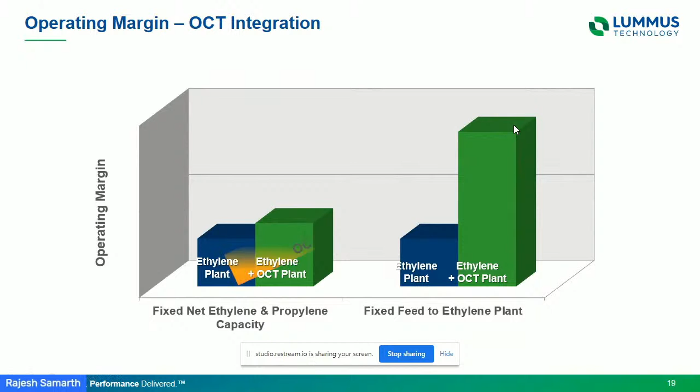This is another one showing the operating margin. Again, the same two schemes are shown here. One is where you reduce feed going to the naphtha cracker, which increases your operating margin because you're making the same ethylene and propylene with less feed. As opposed to that, in this case you have the same feed but you're making more products. That's why your operating margin is going up. So that's a big advantage with OCT integration.

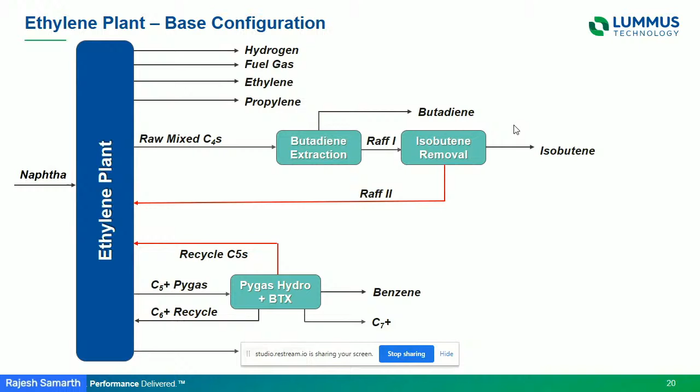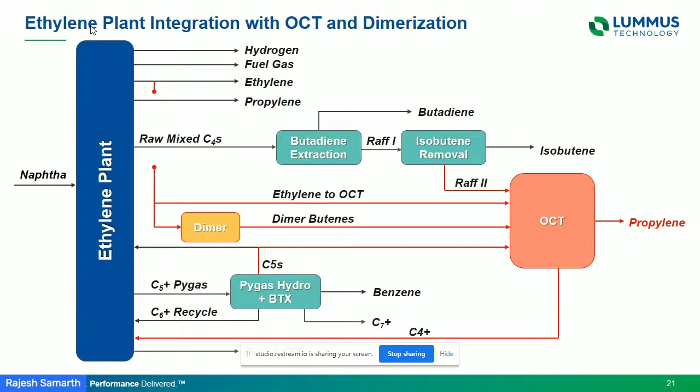Now I'm coming back and showing the same base ethylene configuration. Let's talk about how the dimer OCT can be integrated here. The concept is simple, the same OCT concept. What I'm saying is I want to make significantly more propylene. If I don't have sufficient C4s to do this, I can take some of my ethylene, put it through a dimerization process, and make normal butenes from this ethylene. Then I'm feeding ethylene and whatever C4s and C5s are available to the OCT unit. That allows me to significantly increase my propylene production.

Now let's talk about how this process can be integrated in a refinery. Again the concept is the same. All I'm saying is that a refinery, especially FCC off-gas and coker off-gas, has ethylene, ethane, propylene, and propane in it. So we can use low pressure recovery to separate it from others. The simplest thing would be if you have a steam cracker, you send everything there. As opposed to that, you can use the low pressure recovery unit to separate the ethylene, and use the same route. You can go through dimerization to make C4s from C2s, and with an olefin conversion unit you can make propylene. These units are also operating currently, showing very attractive payback periods of 1.5 to 2.5 years. So you're taking very low value refinery off-gases and converting that to propylene, both the ethylene in that, and you recover the propylene.

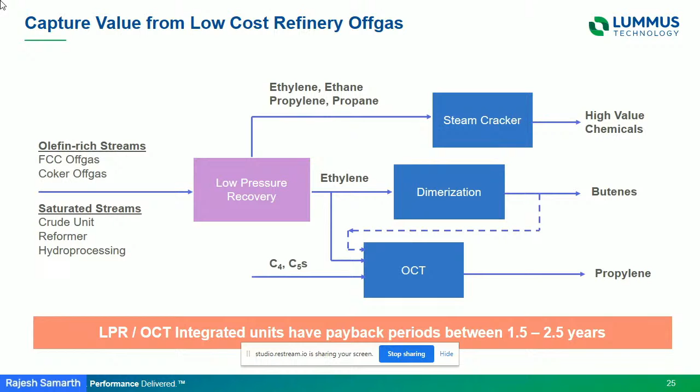So this is the last concept I'm going to talk about, the reverse OCT. Instead of doing ethylene plus butene to make propylene, I'm starting with propylene and making ethylene and butene. Why can I do that? Because on the same catalyst I can do this process since it's an equilibrium limited reaction. So I can just change the operating conditions and go the reverse way.

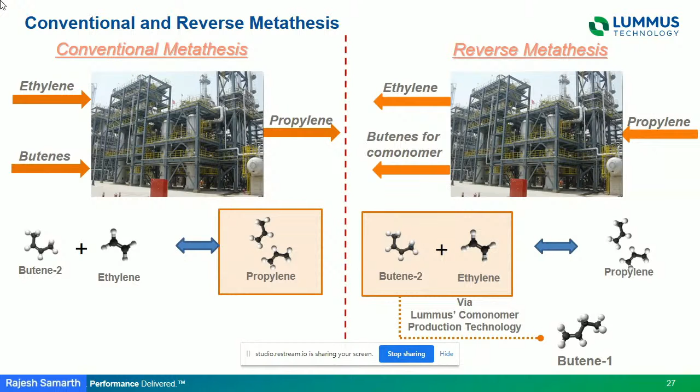So let's see, starting with the same diagram we had earlier. In reverse OCT, all you're doing is taking propylene, or part of the propylene, and making more ethylene.

So you can make more ethylene, and what happens is you can also reduce your naphtha consumption. So when would you do that? When your propylene prices are really depressed. If they're really depressed, you can make more ethylene out of it, and whatever C4s you make, you can recycle it back to the naphtha cracker to make more ethylene.

The other thing you could do, instead of recycling the C4s back, is use that to make more butene 1 and butene 2, because the equilibrium is more favored towards butene 2 than butene 1. But we have this technology for co-monomer production which reverses this equilibrium at different operating conditions, favoring butene 1. Butene 1 is a high value comonomer, so you can use it for that as well by doing that integration.

So now, in summary, the olefin conversion technology is a low OPEX and low CAPEX process to make propylene on demand, an on-purpose technology in a very attractive manner. But this depends on the relative price ratios of propylene to ethylene. Its integration with an ethylene plant is very easy. It also has the advantage that it can increase the production of benzene and even butadiene, the way the process is configured, and these are side effects of it. It allows you to reduce the total energy consumption of the cracker and improve the operating margin.

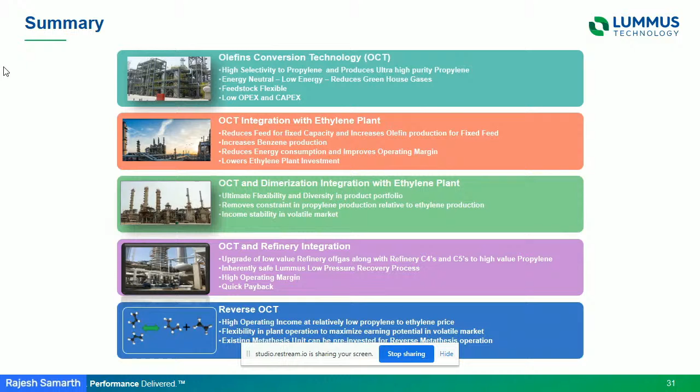So then there is reverse OCT. The beauty of this is, if you have made some pre-investment to allow the reverse OCT, then you can operate your plant in whichever way, because you never know how the prices of propylene and ethylene will be in future. Depending on what it is, you can operate the process in a forward manner or a backward manner and maximize your ethylene or propylene.

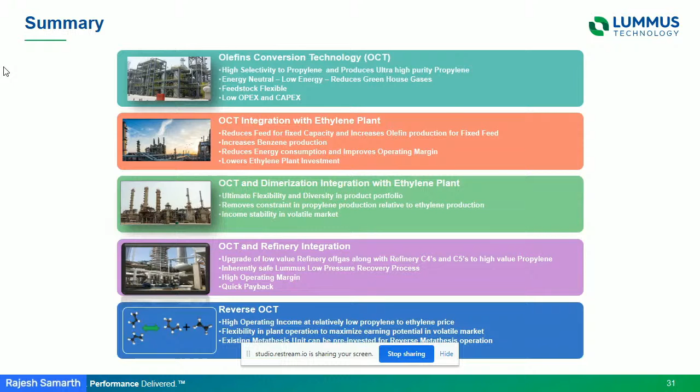So that's all I have. I hope you found that interesting. Thank you.

Thank you, Rajesh. Again, we showed how the process gives ultra low energy and maximization of yield of the target product. Further, there are a number of integration possibilities, configurations also discussed. I quickly go to, there are two questions for you.

One question is about how, unlike competing technologies which are feed agnostic, here you're dependent on the requirement of naphtha, and the energy requirement comes from the naphtha cracker. So these are the two observations. Would you like to respond to these two?

Yes, it is feed agnostic. You can very well make it work in a mixed feed cracker as well. And actually, what's happening is that the more you go towards lighter cracking, whether it's LPG or ethane, your production of propylene really suffers - it goes down as your feedstock to the cracker becomes lighter. So in that case it's very useful. When I talk about the improvement in operating margin and reduction in energy intensity, yes, that is happening for the overall cracker complex, for the amount of propylene you're producing.

Yes. Thank you, Rajesh, I think that's all the questions. We are already running 3 minutes short on time, so I will just sum up by saying each presentation presented various options available for technology innovation - the new innovations coming, small margin improvements you can bring to maximize product demand. That's the major theme covered by all the presentations. These are all upcoming technologies, and hopefully whoever has listened can take it forward by applying it in their own configurations. Thank you very much to everybody for patiently listening. And I hand back over to the host.